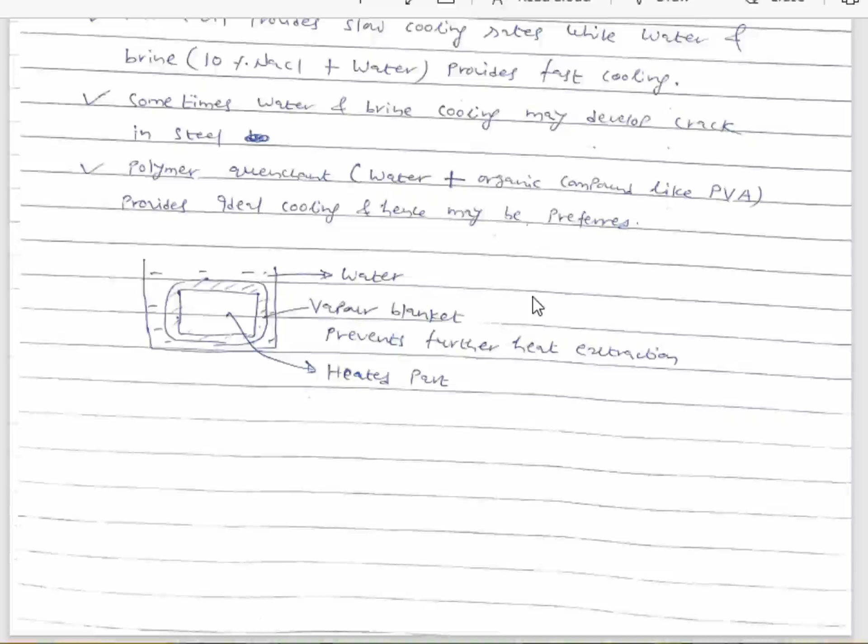So martempering can be easily possible, or we can take the maximum advantage of this procedure, if the polymer quenchant is utilized.

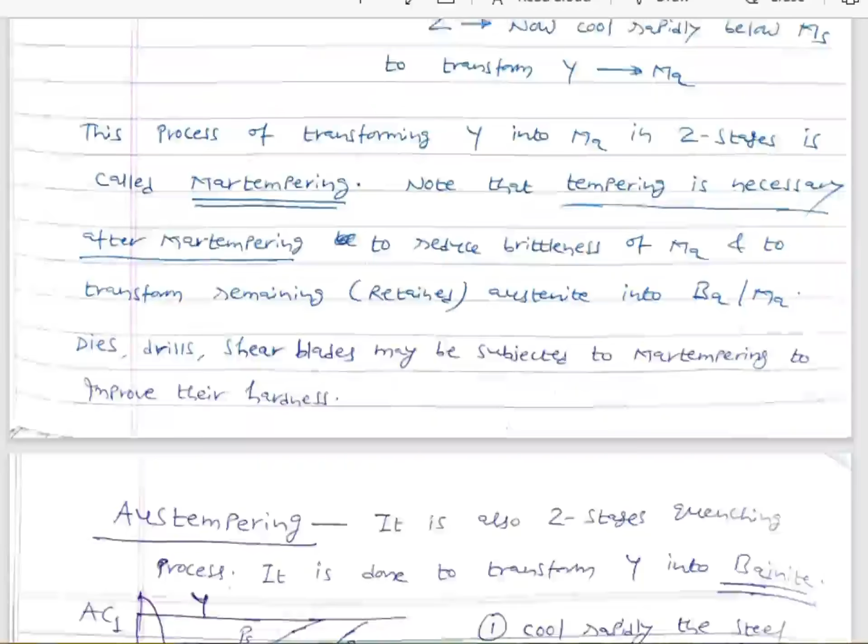Austempering is another kind of interrupted quenching or two-stage quenching. It is done to transform austenite into bainite. Cool the steel rapidly from austenitic temperature to T1 temperature. T1 temperature is just above Ms, as we had seen in the case of martempering.

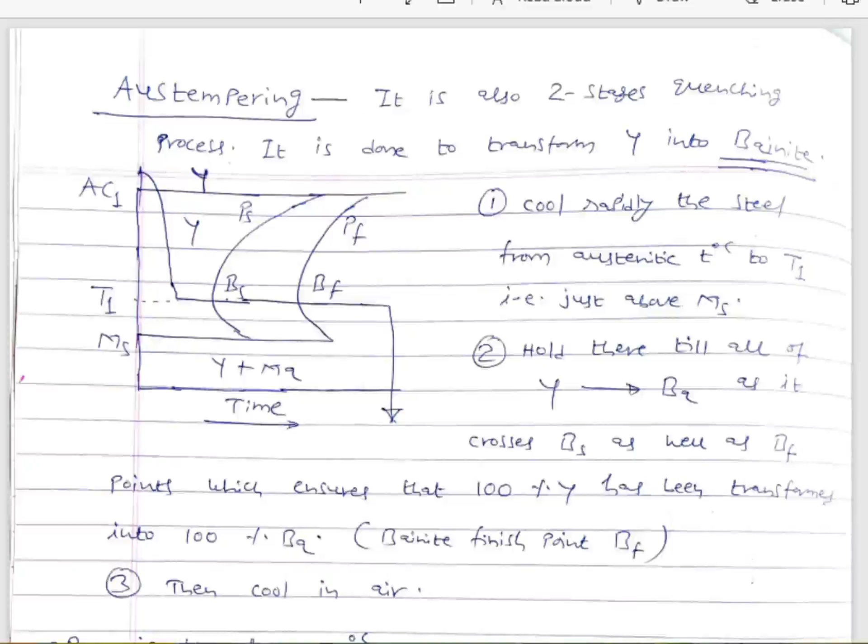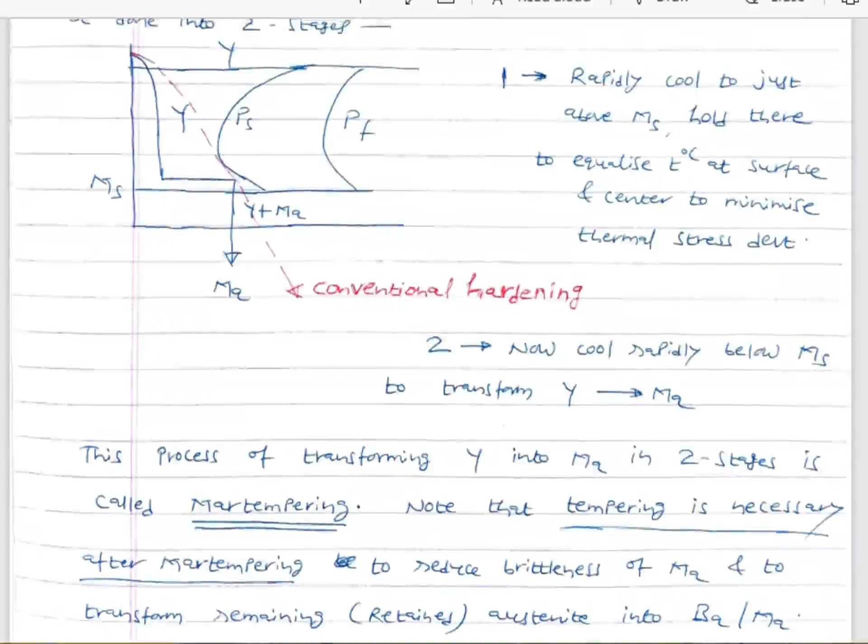But in martempering, we held the steel only for a certain time period, to ensure that the time period does not exceed the Ps point. It should not cross the Ps curve. While here, the time period is crossing the Ps line and Bs line, as well as the Pf and Bf curve.

So as the transformation temperature is low, instead of pearlite, bainite will be obtained, as we have seen in the time temperature transformation diagram. There are three transformation products in the TTT diagram. First is pearlite, obtained in the high temperature zone. Second is bainite, obtained in the medium temperature zone. And third is martensite, obtained in the lowest temperature zone.

So at temperature T1, if you hold the steel for a sufficient time period, all of the 100% austenite will get transformed into 100% bainite. How can you understand? As soon as it crosses the Bs point as well as the Bf point, it ensures the bainitic transformation is finished. All of the austenite has been transformed into bainite. So hold there till austenite gets transformed into bainite.

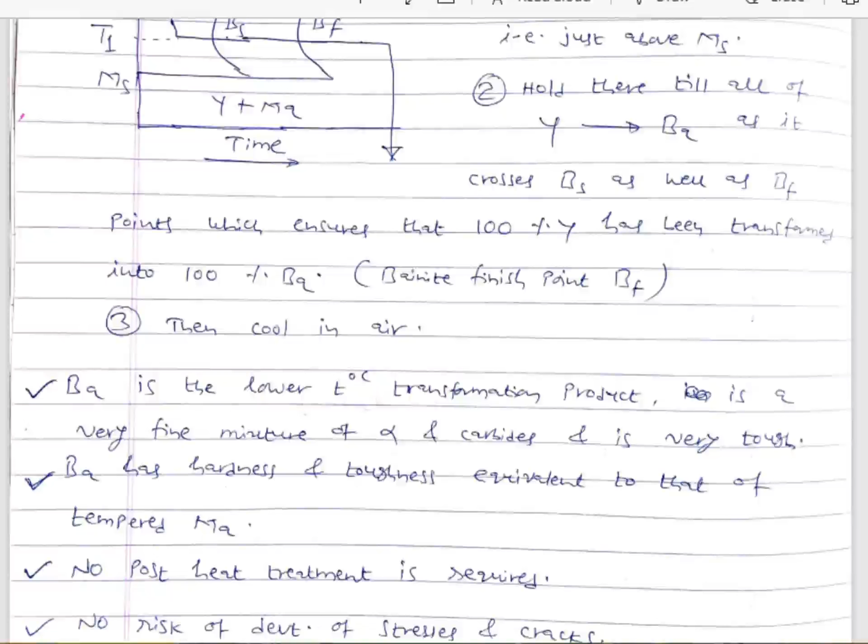Complete heat treatment process in itself means there is no retained austenite; 100% austenite has been transformed into 100% bainite. Second, there are no internal stresses, because we have held the steel at temperature T1 for sufficient duration. The temperature as well as rate of transformation at the surface and center are almost equal, so internal stresses will not develop. For all these reasons, austempering is one of the most common heat treatments in the industries.

Earth moving vehicles, cranes and other lifting equipment, railway wheels, large die blocks, etc. may be subjected to austempering. But one thing we have to keep in mind: wherever more hardness, wear resistance, cutting ability, or abrasion resistance is required, there is no substitute for hardening by quenching. We need to take the risk of development of stresses, take care of it, and subject the part to the hardening treatment wherever more hardness and wear resistance are required.

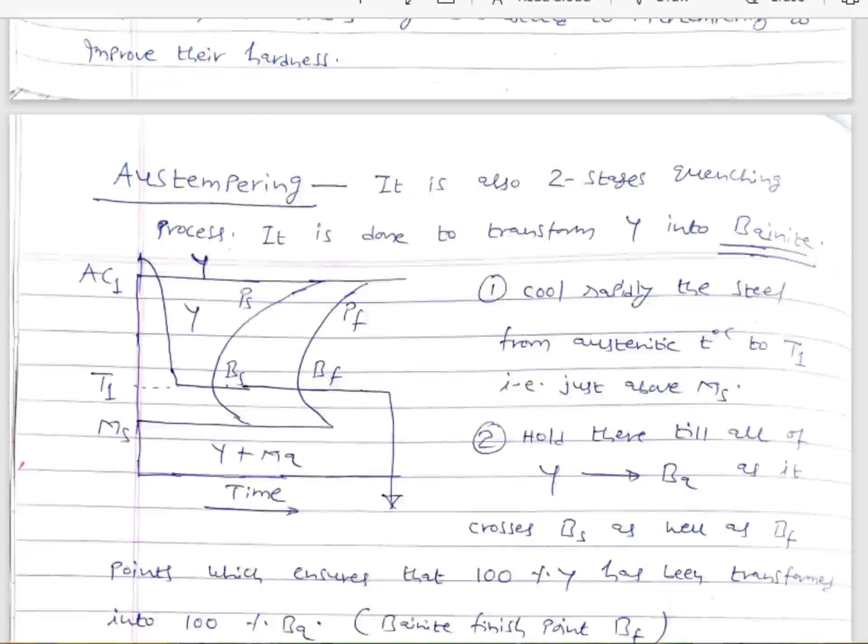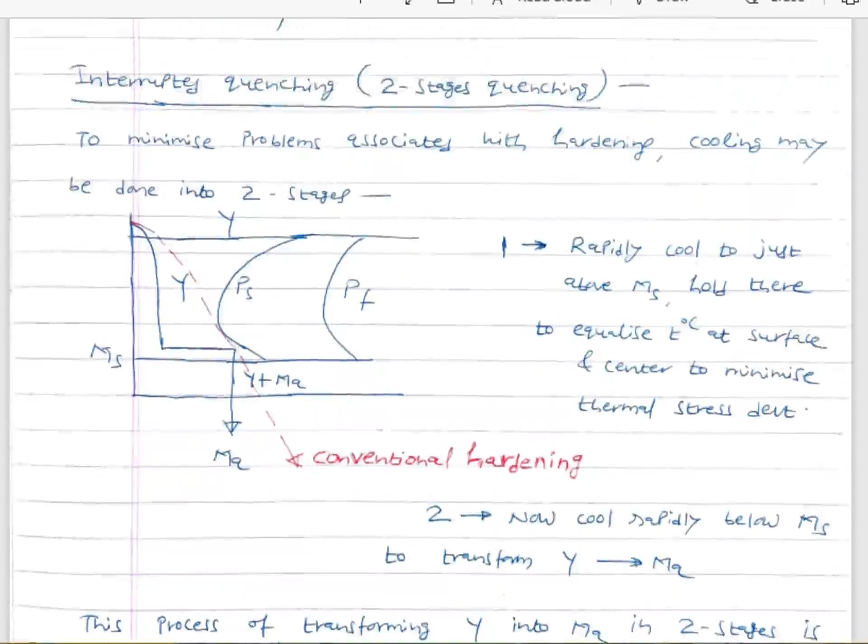So austempering is an alternative where somewhat more toughness is required and we can compromise a little on hardness, like for the items we just mentioned. Austempering and martempering are misnomers; they have nothing to do with the tempering treatment. In austempering, remember that this treatment is done in the austenitic condition to convert austenite into bainite. And in martempering, this two-stage quenching transforms austenite into martensite, so the term mar is prefixed.